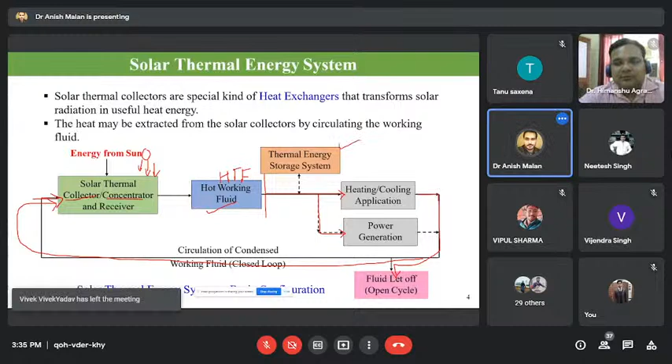Now the thing is, what is this thermal energy storage system for? The idea behind it is maybe you have a heat requirement, and whatever you are generating from the collector is more than what is required for your heating, cooling application or for power generation. In that case, you may think, maybe I can store this extra heat in my thermal energy storage, and later on when the sun is not there, because we have the sun for a fixed number of hours only, the energy stored in the thermal energy system will be used either for heating application or power generation based on our requirements.

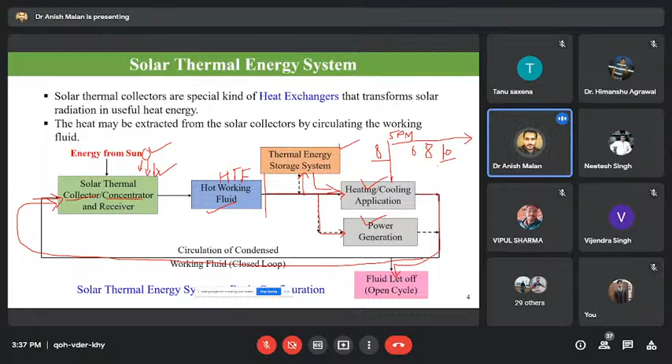Sometimes we do this deliberately, like for power generation plants, where we can't just construct a plant for a working period of only 8 hours in which we will have sunshine, because our capacity utilization factor will drop. So whatever energy we generate, we'll store in thermal energy storage, and then after 8 hours or so, in the late evening hours post 5 when there is no sunshine, we can use that energy to extend the working of our plant for as many hours as we can. We can go for 6 hours, 8 hours, or 10 hours of storage based on the cost requirements. So this is the general view of the solar thermal energy system. In whatever system you see, you will find these particular components.

So next, we'll share some details on the solar thermal collector. We know about collectors, so how can we segregate them? How can we distinguish what kind of collector will fall in what category? The first thing here is we are dividing them on the basis of whether they are concentrating or non-concentrating.

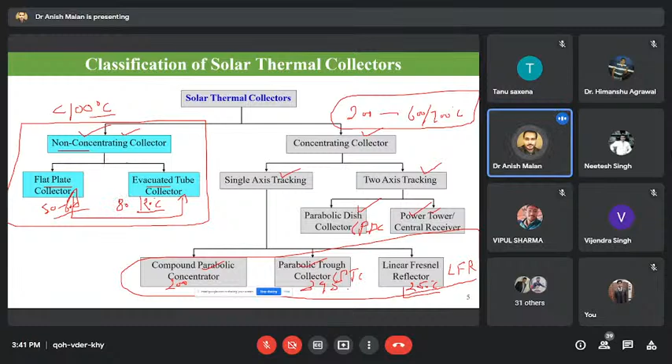If it is less than 100 degrees Celsius, you may be more likely to use non-concentrating collectors, that is flat plate collector or evacuated tube collector. In this category also, flat plate collectors are generally utilized for a temperature range of 50 to 60 degrees Celsius only. And it may go up to 120 degrees Celsius; some studies report that even higher temperature ranges are also achieved. But generally, the temperature range for this particular type will be somewhere between 80 to 120 degrees Celsius.

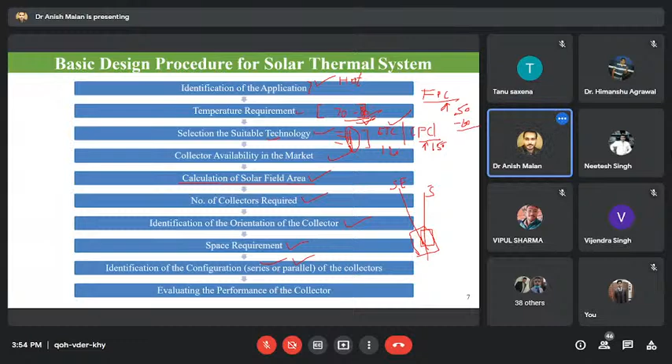So any questions till now, or is there anything that I need to work on, whether speed or language or something? So you can answer. Sir? Okay, I will consider it as a no.

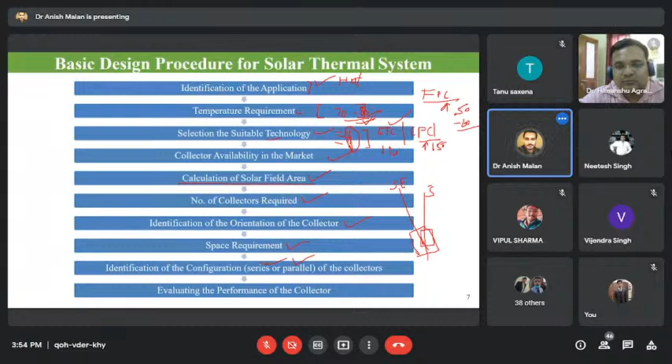In order to avoid heat loss from the system, some insulation material is used to mitigate the convection and radiation losses to the environment. And then the whole system is placed into the outer cover so that we can protect it from dust and moisture from the atmosphere. So this is a very simple system, being used for many decades, and is a well proven one. Sometimes you will also hear the term selective coating associated with flat plate collectors.

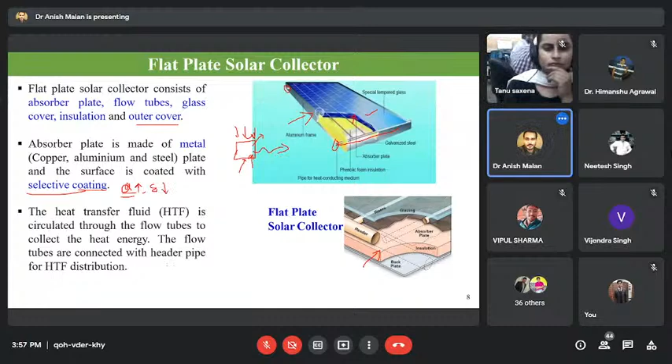Generally, two kinds of configuration have been explored or utilized. One is the parallel flow configuration, and second is the serpentine flow configuration. But mainly the parallel flow configuration is what you will see. The temperature will be higher in the case of the serpentine configuration, because the heat transfer fluid will be in contact with the plate for a longer duration of time. So heat transfer will be better here, but because of the complexity of the system, these are not generally used. Mainly, the parallel flow configuration has been used.

And at the start of the session, I used the terms beam and diffuse component of the radiation. As you may be aware, the incoming solar radiation is composed of two components. One is the beam component and one is the diffuse component. So the basic idea behind that is

just a minute. Hello,

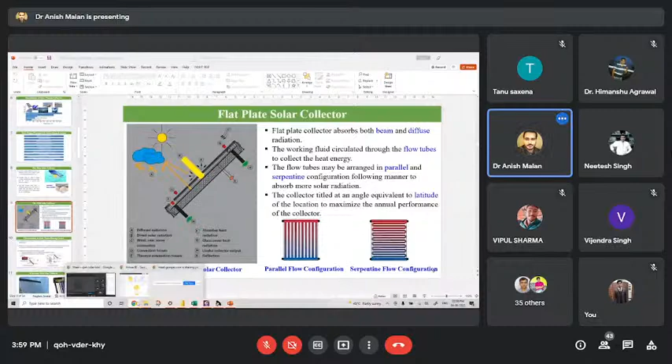hello. हाँ हाँ yes. Sir, just give me 1 minute time.

I have some issue with the video, with my presentation. Just give me 1 minute, sir. If that is okay with you. Okay.

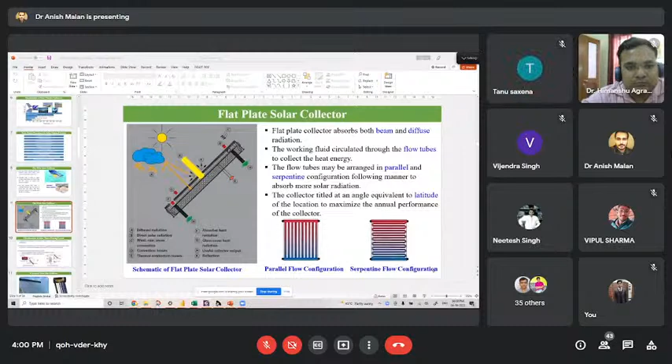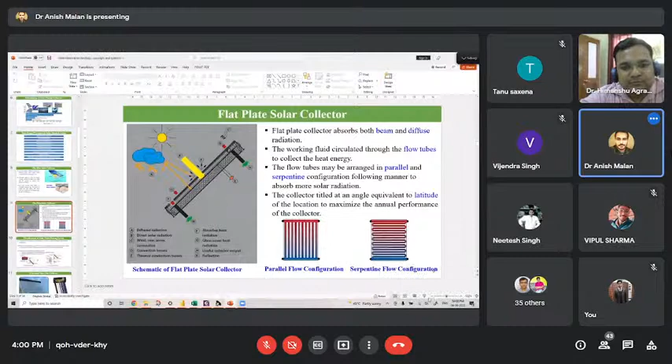Okay. So we are discussing the diffuse and the beam component. If you see the diagram on the left hand side of the screen, some component of the radiation is directly coming, it is not deviating from its path, meaning it has some specific path associated with it.

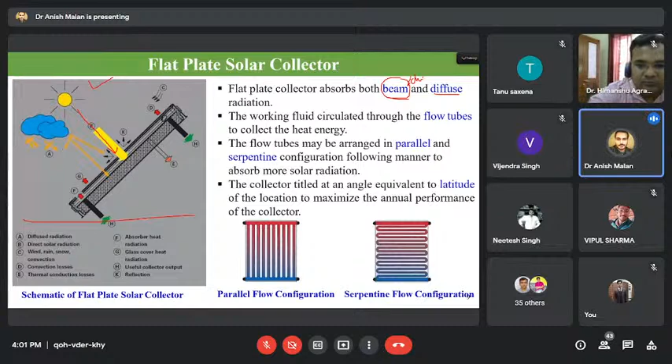So this radiation component of the solar is named the beam component or the direct component, and some part of the radiation is coming in any arbitrary direction. For example, because of the clouds, the radiation first comes here and it will have some deviated path, something like this, or some other deviated path, something like this.

And here, for example, you may consider it as Earth, and from here also it may reflect back the radiation. All these radiation components which have different arbitrary directions are associated with the diffuse component. These don't have any specific direction associated with them. So the flat plate collector entertains both, whether the radiation has some specific direction or not. If it is falling on the receiver surface, it is going to absorb it.

So this is the beauty of the non-concentrating collectors, because here you need not worry about whether you are only working with some specific kind of solar radiation.

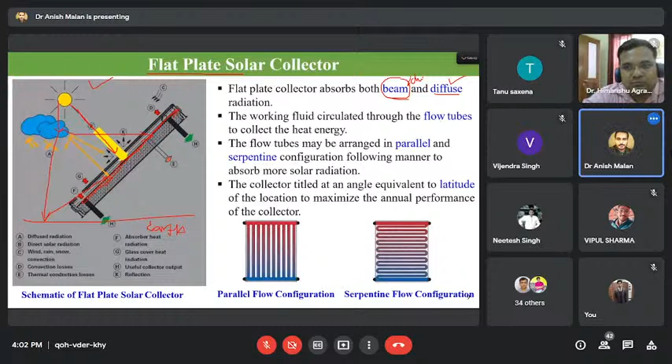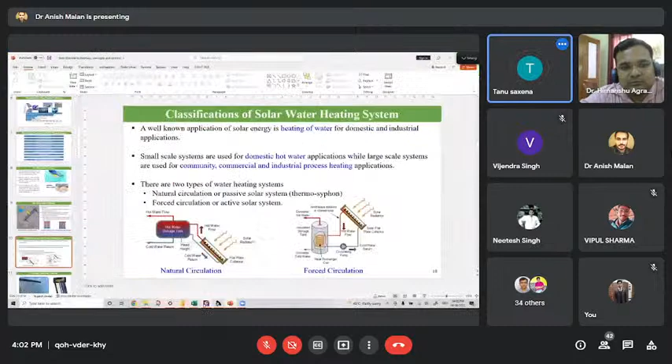Hello. Yes. Just a minute, sir, it's hanging again. Sorry for the disturbance. So, first thing I wanted to ask, is there... Please unmute your mic. Okay. Sorry about these disturbances. I actually have some problem with my internet, so it's getting stuck in between. Okay. So am I audible now, sir? Fine.

Yes, audible. Okay. So further on, let's carry on our discussion on the solar water heating systems. These are the two configurations I have represented here, natural circulation and forced circulation. Both are associated with the solar water heating system, and it is applicable to the evacuated tube collector as well. In natural convection, we'll be using one tank, and there will be no circulating pumps because it works on the thermosiphon effect only. For forced circulation, we'll be using some circulating pump.

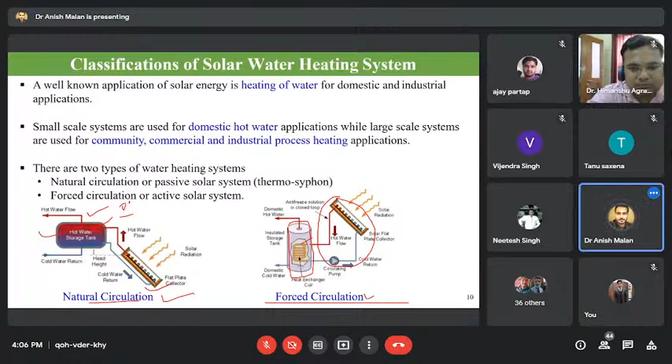So in that particular situation, forced circulation systems are used, because here the systems are closed and have very minimal impact from the environment, and if they do, we may use some anti-freezing additives with the heat transfer fluid so that it will not freeze up. That solution will be provided so that the water inside our collector will not freeze up, and later in the external heat exchanger we can circulate the fresh water and get hot water from it using a shell and tube type heat exchanger.

Okay, so another category is the evacuated tube solar collector. Generally these are now being utilized for water heating purposes. Compared to the flat plate collector, you are able to get higher temperature ranges here. I'm not getting into the details of why we are getting high temperature out of these collectors, because that may further increase the time and is not within the context of today's presentation.

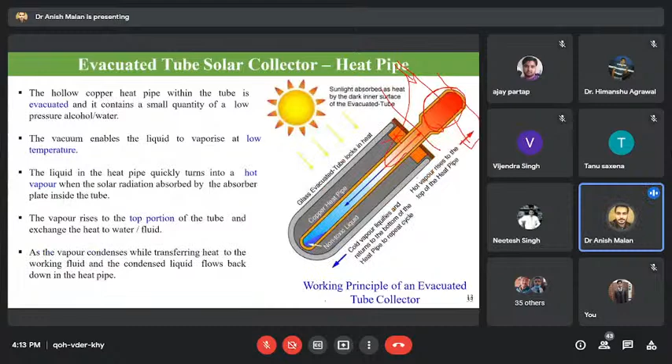So, which means that if this is a complete system with, for example, 4 or 5 tubes, and any of the tubes is broken in between, the complete system will shut down. But such a problem is not there with the heat pipe based ETC, because here we are getting in contact with the probe, so there will not be any kind of leakage if, for example, this tube breaks down in between. So there will not be that much effect on the system, and the system will still produce some output.

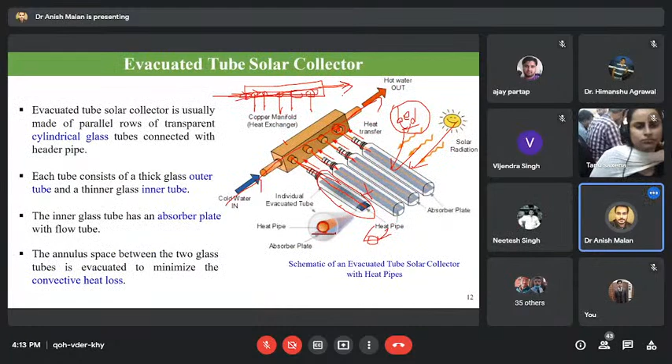Okay. So this is the basic difference between the heat pipe based evacuated tube collector and the tube in tube based evacuated tube collector. Hope this is clear. So till now we have discussed these. Now we'll be jumping on to the concentrating collectors.

The first category that we'll be seeing in the concentrating collectors will be a single axis system. So this is the same slide, but it is for recapitulation, to see the temperature ranges where we can work. So now we'll be dealing with these three. To start with, we just need a brief introduction about how these concentrators work, what kind of configuration and what kind of shape they will be having.

So for that, just for the information, all of the concentrating collectors have one single common thing. There may be others, but the major common thing is the shape of the collector, a parabola. It will be a three-dimensional parabola or a two-dimensional parabola.

So in the concentrating part, we have first heard, back during our elementary education days, of this property of the parabola: when the radiation falls on the parabola, it will direct it to the center of the receiver. This property has been utilized in all the concentrating collectors, so all of them work on the same phenomenon.

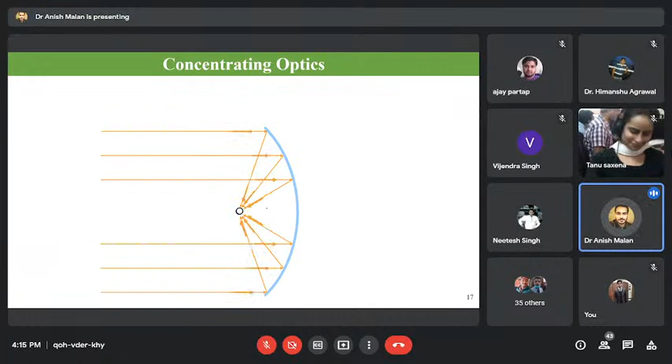So now, based on my earlier explanation about the beam and diffuse component, will it be able to work on diffuse radiation? No. The answer is no here, because of the property of the parabola. It is only able to use the incoming radiation that is parallel to the axis of the parabola; only that will be entertained for process heating, heat generation, power generation or any other application you want to do.

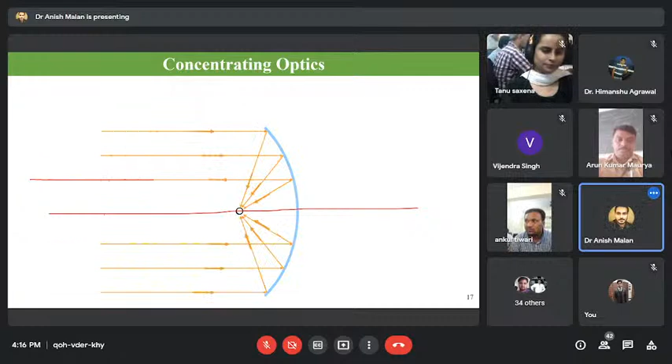So this is one limitation for the concentrating part, because it only works on the beam component. Okay. So that is clear now for the case of the concentrating part. Now, there may be two different types of collector configuration, as I said: it may be 2D, it may be 3D. And there is the concentration ratio, CR, which is the ratio of the aperture area and the receiver area.

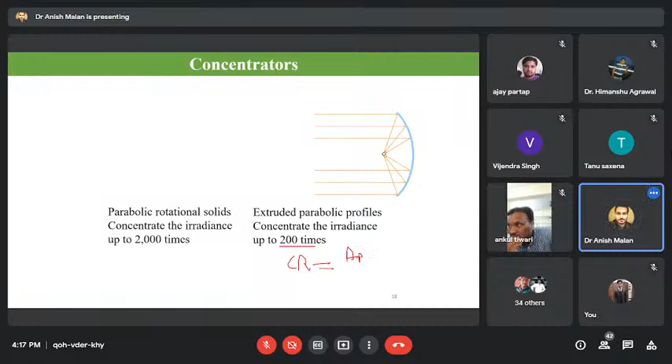So here, if I point to this particular diagram, this is the aperture area of the 2D profile, and this particular section here is AR. So it is clearly visible, I guess, that there is a huge ratio difference between the aperture area and the receiver area. That's why we'll have more energy associated with a small receiver section, and that's why we end up with higher temperatures in the case of concentrators.

But it's not like we can increase the concentration ratio to any extent. No, it's a big no, because thermodynamics and the laws associated with heat transfer restrict this to a particular extent. For the parabolic curves that are only 2 dimensional, the CR can be maximum up to 200. Okay, this is also an ideal scenario. In the actual scenario, the 2D concentration is utilized up to a CR of 80.

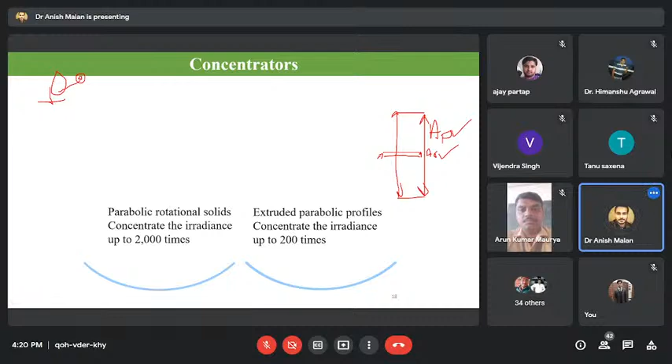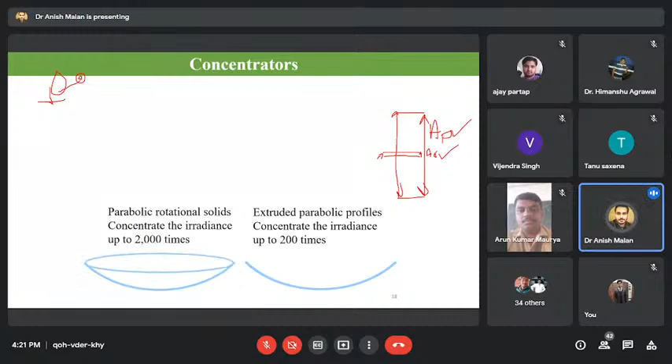But for the 2D, what we do is extrude the parabolic profile. Extrude means orthogonal, perpendicular to the parabolic shape. If we extrude it, it will go something like this; the shape will be 2D. That is the basis for the formulation of the single axis tracking system. Maybe from this animation it will be more clear: for the 3D profile a complete revolution will be there, and for the 2D it is extruded.

So the same system now. If you remember from the earlier slides, we talked about 4 kinds of such systems: parabolic trough collector, linear Fresnel reflector, dish collector, and the power tower. All four are part of these two profiles only. The LFR and PTC are part of this particular profile, and dish and power tower are part of this particular profile. So how can we now arrive at the LFR and the PTC?

So first, this particular shape is the PTC only, and the receiver will also be there, which you will see in the coming slides. Now the same profile has been used to provide the configuration of the LFR, which means we have discretized the profile like this and placed it on the ground. Now it's not a complete profile; there are some sections of the profile.

And after that, if we extrude this, it will form a structure that is very near to the ground, but is flat in profile. But overall, if you look, the profile is of a parabola. Okay, so such systems are known as the linear Fresnel.

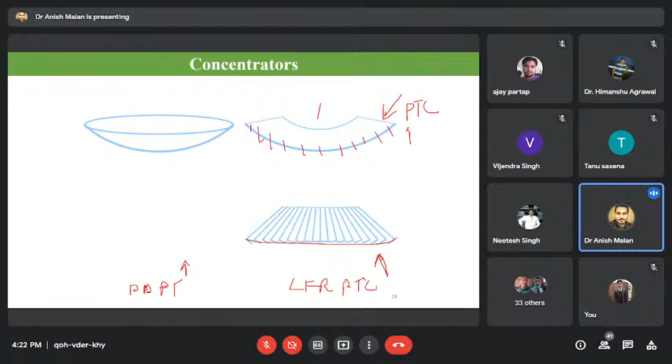Okay, and how they have arrived: now, you may see the distance is not the same as it is here, because it is not the similar one, but this section is a part of a very large parabola. For example, in that large one, we only consider this section, which is a flatter one. So for that we have discretized this angle that has been used. The similar story is with this one.

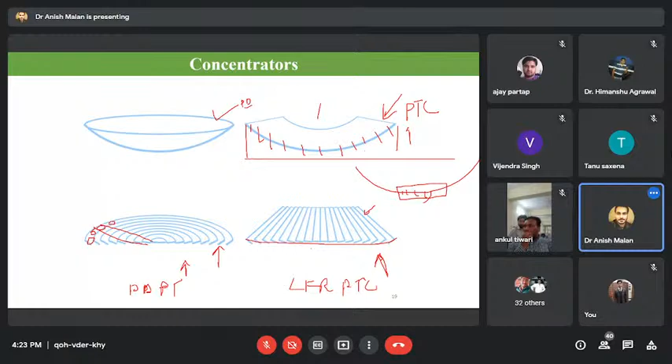This is a dish collector, parabolic dish collector shape, not the exact shape but imitating one. So if that is placed on the ground, the same distribution, and make a 3D revolution. So in such a system the mirrors also will be like this. There will be one flat mirror there, one there, one there. So these can be placed onto the ground. So this particular type of collector is termed as the power tower. Okay. So hope these are clear now.

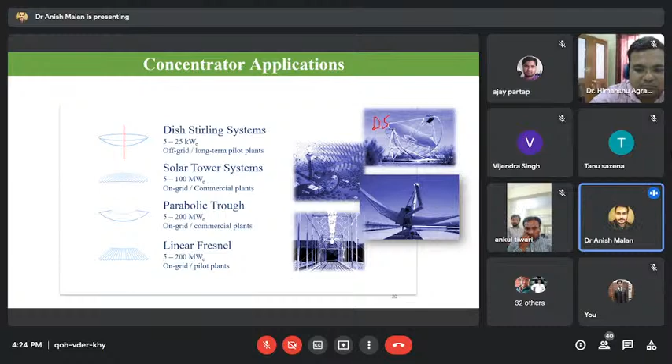So we will be looking at some images related to them. So first is the dish collector, in which the complete profile will be a 3D profile, and this is the pictorial representation for the same. So there will be this dish and the receiver, and here the concentration ratio we can increase up to 1,000 or 1,500. So the same system, if it is a part of a very large parabola, making it 3D and distributed on the ground, a similar kind of structure will form. This is a part of power tower.

Okay. Now these are a part of three-dimensional figures. So here for the tracking of the sun, we need to go for dual axis tracking. The second category is the parabolic trough and linear Fresnel. They are a part of single axis tracking, and generally the term linear parabolic collectors has also been utilized for this, and for them a line collector configuration has been set.

So this parabolic trough profile is something like this. One parabola will be there, and the receiver section will be there, and it will be extruded along the length. Now, if the same system is a part of a very large parabola, the same profile, if we distribute, cut that and place it on the ground, something like this will form. This is a part of LFR. So what kind of applications these are generally used for has been pointed out in this particular slide.

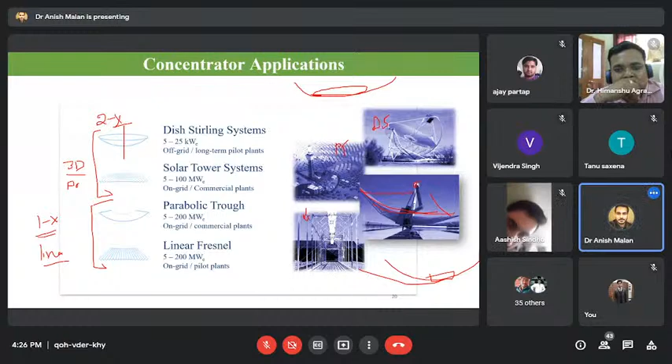So this is just a brief about how these concentrator profiles look and how these configurations have been arrived at. So just to summarize, since we are running out of time, I'm concluding with only the parabolic trough collector. So it's a kind of linear plant, a solar thermal based plant, in which we'll be having a

parabolic trough collector distributed throughout the region, and the complete surface will be termed a solar field, and this will be the power unit in which the heat transfer fluid will be flown and collected at some particular location, and that is further utilized to generate steam, and the same is expanded in the turbine to generate power from the system.